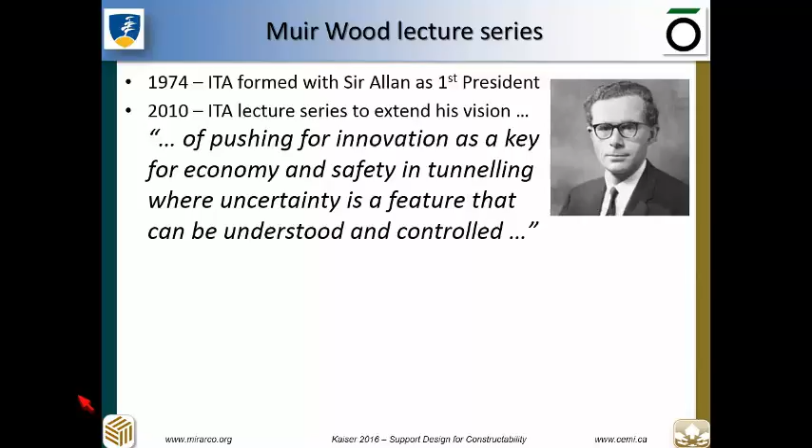As was just said, the lecture series was created to keep the spirit, the vision of Sir Allan alive, and to push for innovation for economic and safe construction in tunneling situations where uncertainty is part of the problem. Previous lectures have dealt with issues of hydrotunneling, large tunneling projects, machine tunneling, subaqueous tunneling, and tunnel face stability.

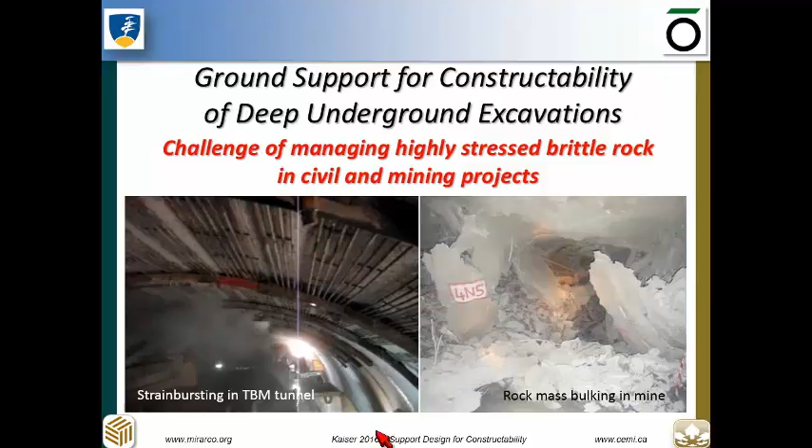I've chosen to talk to you today about challenges of managing highly stressed rock in brittle failure modes for both civil and mining projects, simply because I have seen that many projects are suffering problems in these conditions, and innovation, as in the left image, is needed to deal with strain bursting conditions. If it gets out of control in mining, we have serious instability problems that have to be mastered by better understanding what the rock is doing and what the support has to do.

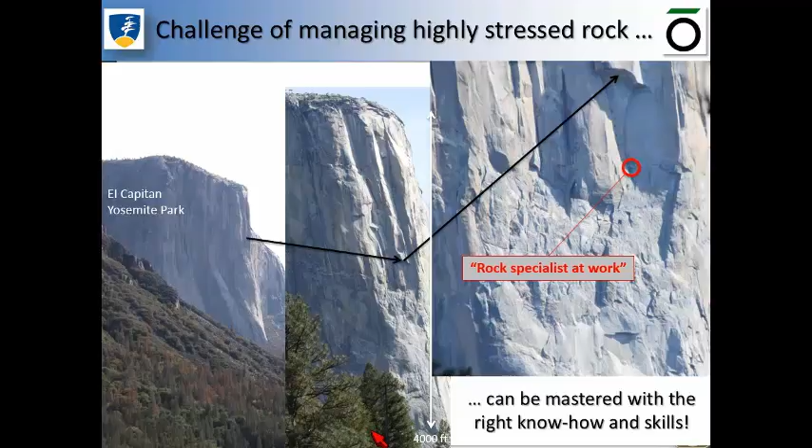Having just spent the week in Yosemite Park, I couldn't resist putting this slide in to indicate that I have a very narrow focus. I will address this topic from a rock mechanics perspective, and also to indicate that there is no challenge too high that it cannot be overcome when we have the right know-how and the right skills. You may not see the little guy in the image climbing the cliff of 4,000 feet. It takes a climber typically two days with two overnight stands. This individual can climb it in less than five hours, 4,000 feet vertical.

I was always inspired during my research by Sir Allan's writings, his books, etc. Unfortunately, I never had the pleasure to work with him or to meet him. But one notion that he presented at the British Tunneling Society reflects the content of the message that I have today.

Tunneling contracts are best implemented based on a detailed design procured by the client before tendering the construction contract.

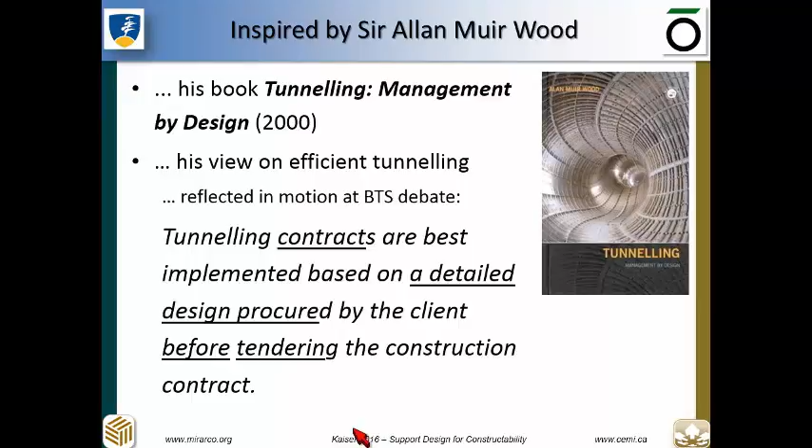Robust engineering, independent of whether the engineer or the contractor is responsible for the design, has to take into account the complexity and variability of the geology, and has to consider aspects of construction so it can be built efficiently, safely, and with an effective support system. For that purpose, it is necessary to properly describe and anticipate the rock behavior as well as the excavation behavior.

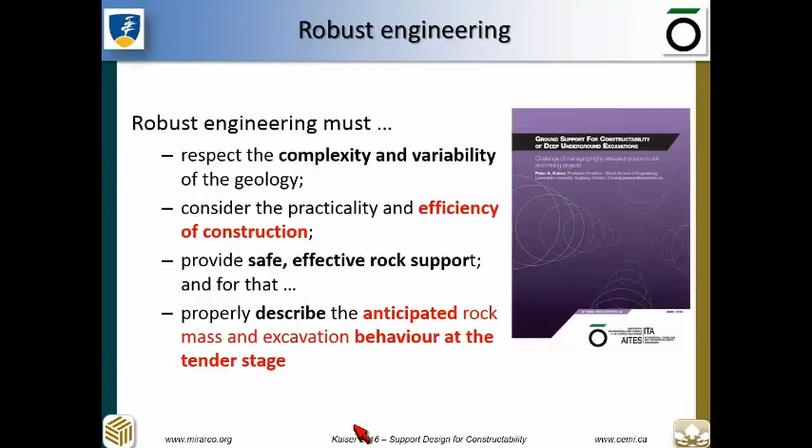In my experience, many problems that we have encountered in deep construction come from the fact that the behavior was not properly anticipated, not described, and as a result, the efficiency of the construction process was hampered.

Dr. Hoek, in his online lecture on the art of tunneling, uses this matrix to describe the failure modes that we can anticipate in tunneling, characterized by the stress level on the vertical axis and the rock mass quality or strength on the horizontal axis, basically describing the whole spectrum of tunnel behavior from essentially elastic to squeezing condition in the lower right.

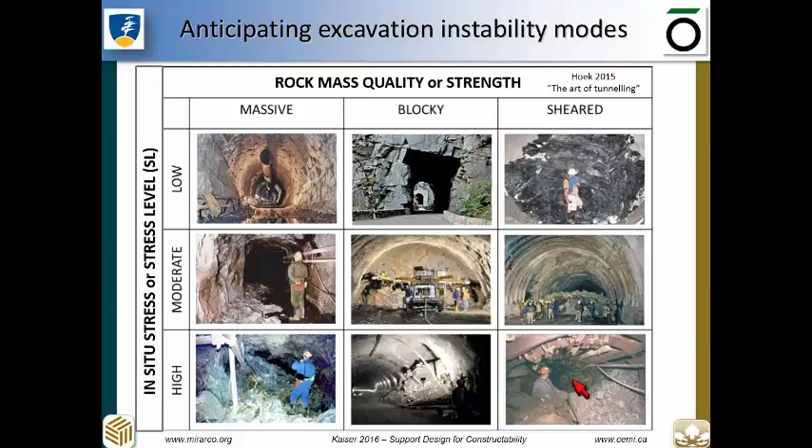Terzaghi, in the mid-1940s, was the first to try and quantify how different rock classes behave. He used different classes to describe what the rock load on steel sets should be, linking the geology and ground condition to the tunnel behavior and support requirement.

All the rating systems that we use today, Q, RMR, and in our case GSI, to get numbers for rock support design or for the determination of strength, are basically built on those early steps.

I had the pleasure to work with Dr. Hoek to establish the GSI system, and as you can see on the left side here, one axis is basically built on the rock classes that Terzaghi had identified, the blockiness of the rock mass.

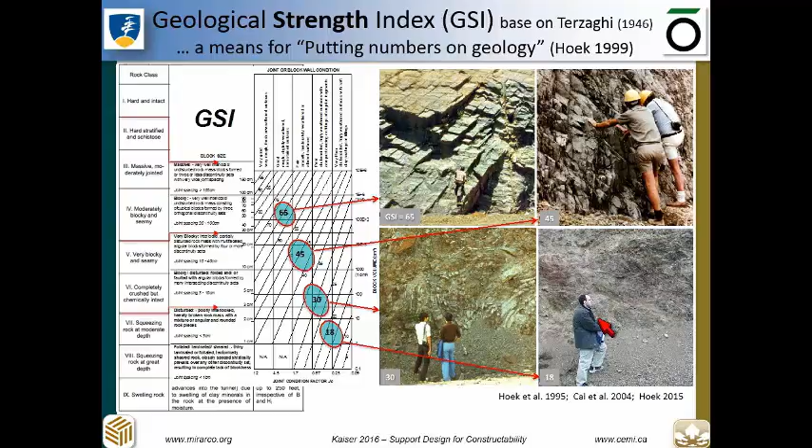It is then combined with the joint conditions that make up the blocks, and in this way it is possible to assign a number to a certain rock condition. You see four examples, from reasonably good quality rock to poor quality rock. GSI is not an accurate or magic number, but it gives us the ability to assign numbers or ranges to the rock quality needed to identify the anticipated failure modes.

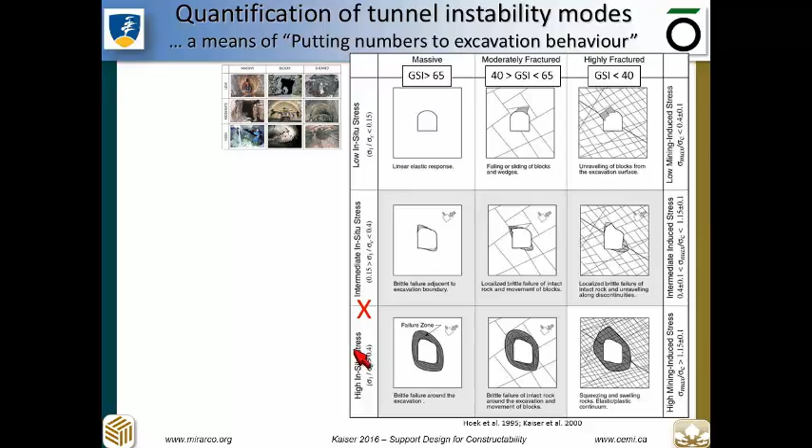On the vertical axis, we have the stress conditions, typically described by the overburden, which unfortunately leads to many problems, as I'll explain later. It is much more appropriate, as shown on the right side, to define the stress level by the maximum tangential stress around an excavation, which can be simply calculated from the principal stress values and the stress ratio.

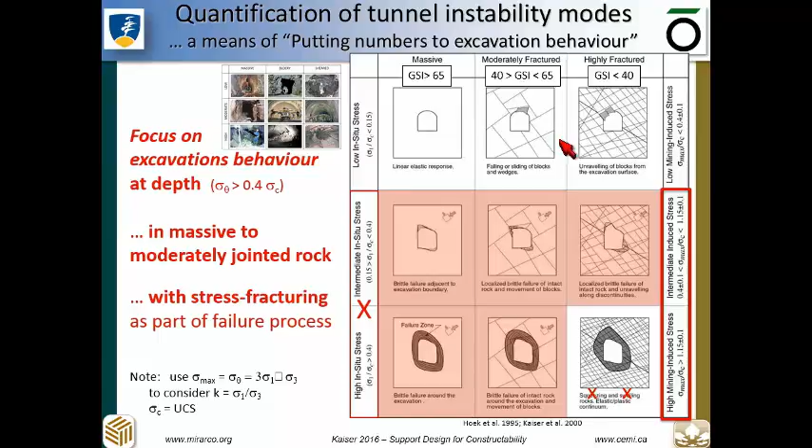I'll come back to this later, but by the hatched areas, I'm indicating that my talk today is focused on these five rock classes, not on cases where structurally controlled failure dominates or where we have squeezing or swelling conditions.

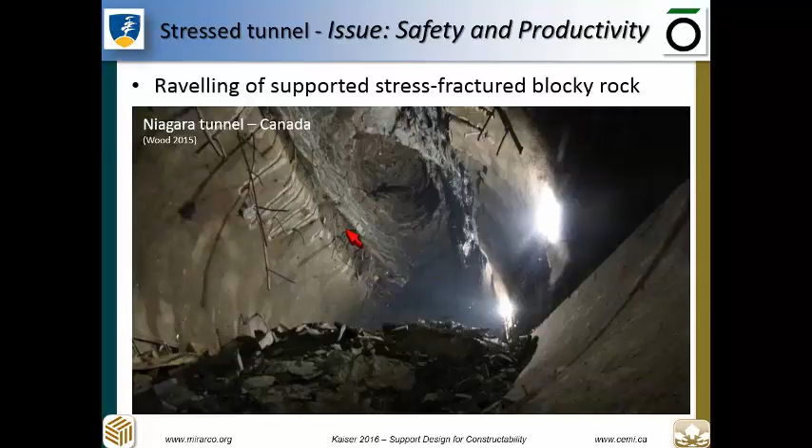Just two examples to illustrate what I'm talking about. This is a tunnel many of you have heard about, the Niagara Tunnel, where we ended up with severe instability problems, as shown here, because of high horizontal stresses causing failure in the roof. The contractor realized the problem and tried to overcome it with supplemental support. The point I like to make is that this type of condition was not anticipated at the tender stage, and therefore led to serious safety as well as production issues.

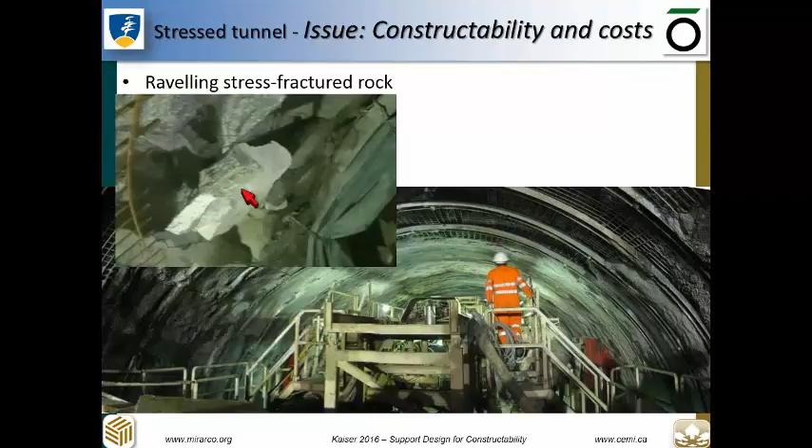The second example, from the Gotthard Tunnel, shows stress-fractured rock emerging from the TBM finger shield. You see the stress fractures in individual blocks, and the consequence is what I call raining rock behind the finger shield. When the support system, designed with U-profiles, had to be installed, we end up with flying arches that are not in contact with the rock and therefore do not immediately function as a support system.

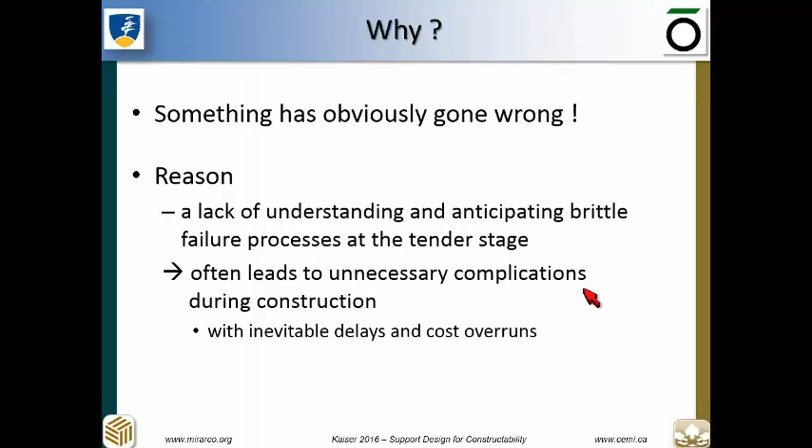So when we have these kinds of situations, we have to ask ourselves, why do we have these problems? What do we not understand? In my view, most of these problems are related to the fact that the brittle failure process of the rock mass is not understood at the tender stage. I'd like to explain to you why, and how we can anticipate these types of conditions so that we don't have interruptions of the construction process.

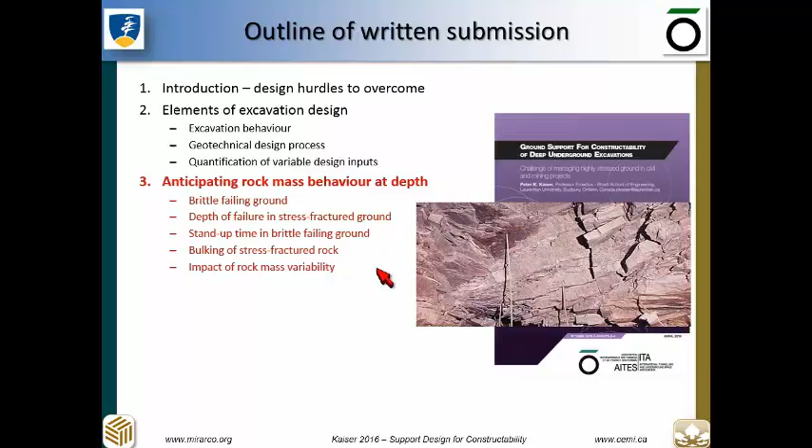I will focus on the anticipation of rock mass behavior at depth, and then try to summarize how that should impact support design, what I call deformation-based support design, towards the end of the lecture.

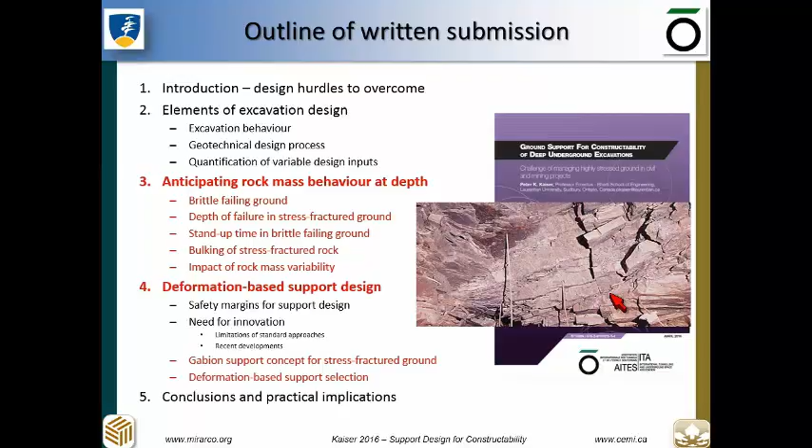On the right here, you see an image of a rock mass that illustrates what I'm talking about, a rock mass that is stress-fractured and is falling apart into blocky fragmented materials.

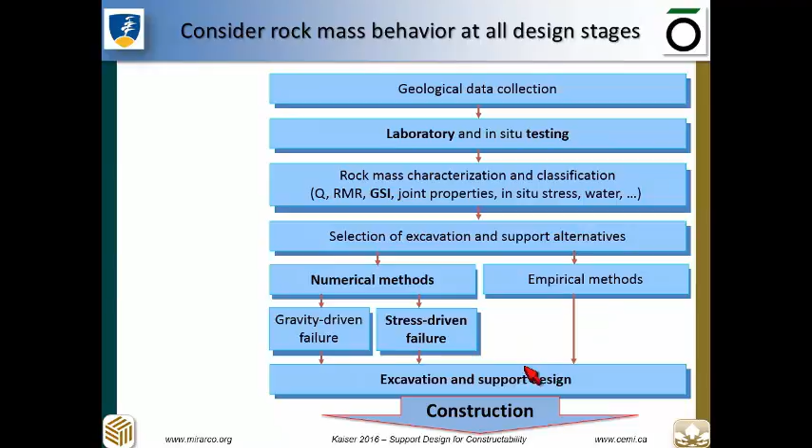The general process of designing a tunnel from a geomechanics perspective includes the various aspects everybody's aware of: geology, data collection, drilling, laboratory testing, classification, leading to a preliminary selection of the support system as well as the excavation technique, then more sophisticated numerical analysis or empirical techniques to come up with something that we hand over to the contractor to build the tunnel.

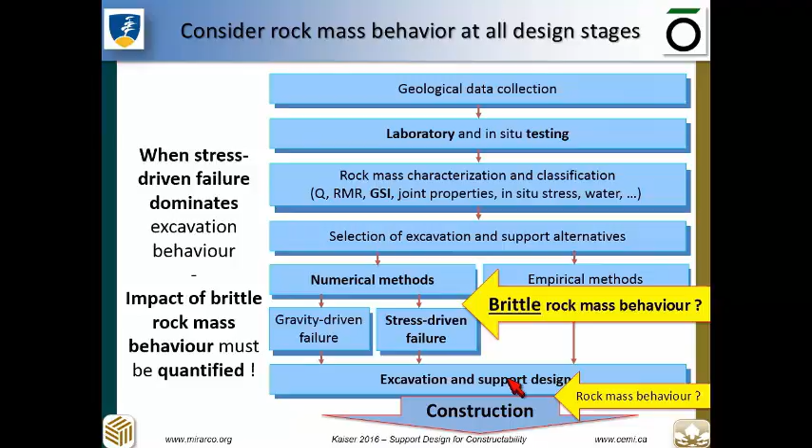When we deal with brittle failure and stress fracturing, as I just indicated, we have a problem at the interface between numerical modeling and empirical methods in determining the construction problems. So how does brittle rock fail?

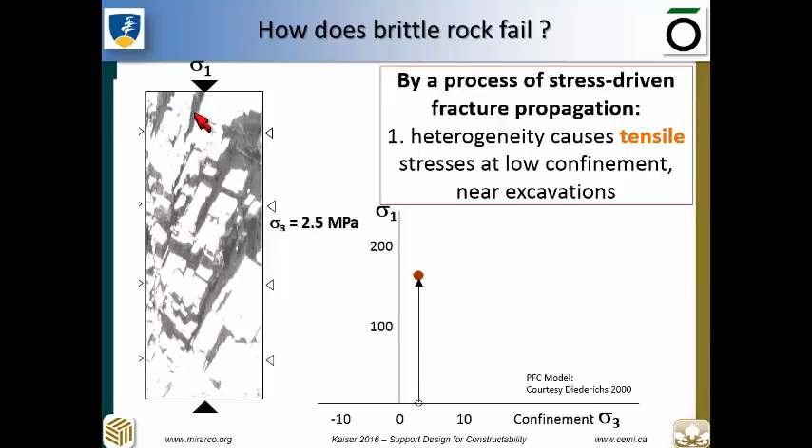I'm illustrating this on a heterogeneous sample loaded in the vertical direction, confined with 2.5 MPa, more than any support can provide. As you load this piece of rock up, you end up with a stress distribution that is not uniform.

As the dots indicate here, you end up with islands of tensile conditions in a rock mass that overall is confined, but locally is not confined.

If we go back to work by Griffith and Hoek and others in the early 1900s, and combine this with the fact that cracks propagate easily as confinement is reduced, we understand that spalling behavior, as illustrated here with parallel fractures to the excavation, must be expected whenever tensile or near tensile conditions are generated in the rock.

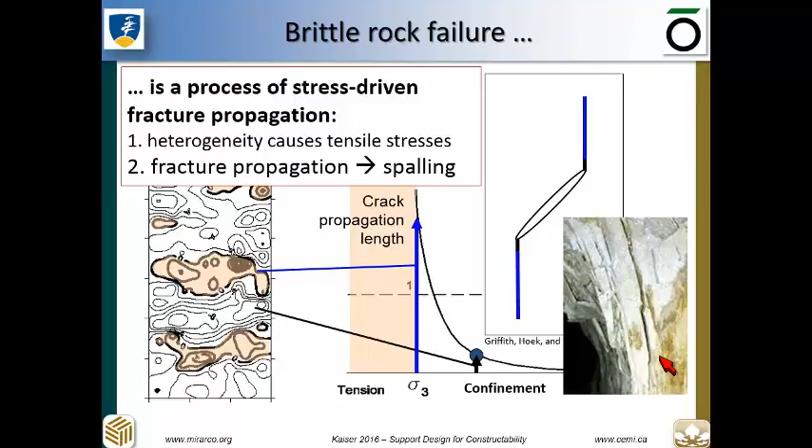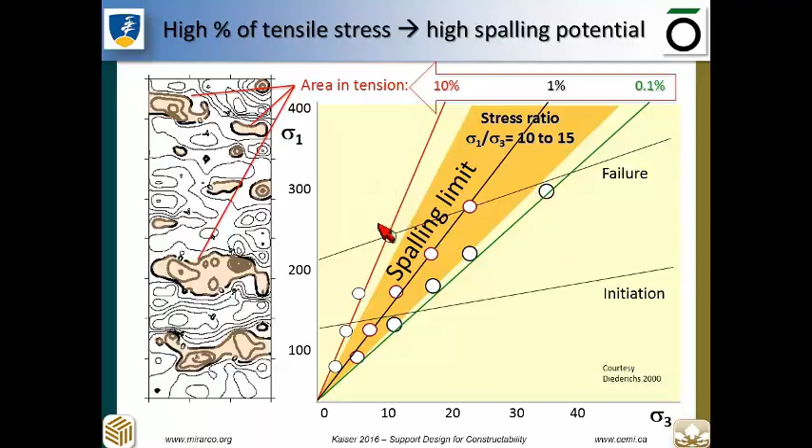Putting it the other way around, there is a limit, which we call the spalling limit, when we cannot confine the rock enough, and we have spalling behavior, as I just showed you in the previous slide.

The practical relevance is that the rock mass strength we anticipate using standard procedures is severely depressed in the low confinement area, so instead of a continuous failure envelope, we have an S-shaped or trilinear failure envelope. The major point is that the strength near the excavation in these rock types is about 50% or less of what we typically anticipate.

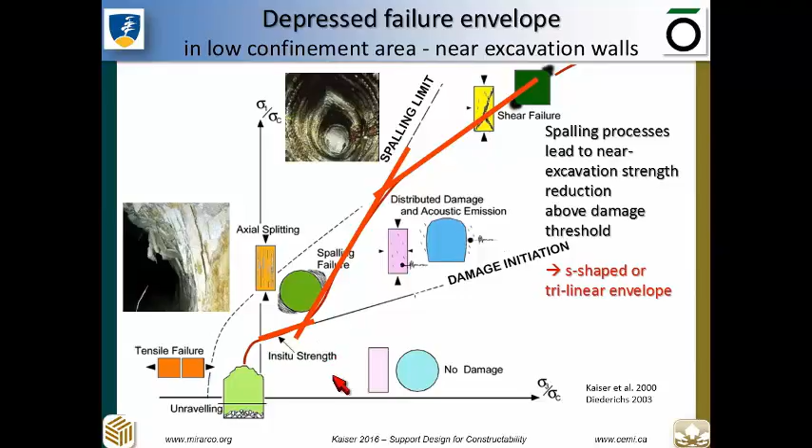For practice, this has a very important implication: to the left of this limit, shown here at 10% of the UCS (unconfined compressive strength), spalling processes dominate, whereas to the right, shear failure mechanism dominates. For practice, it means all the problems related to support selection, related to strain bursting,

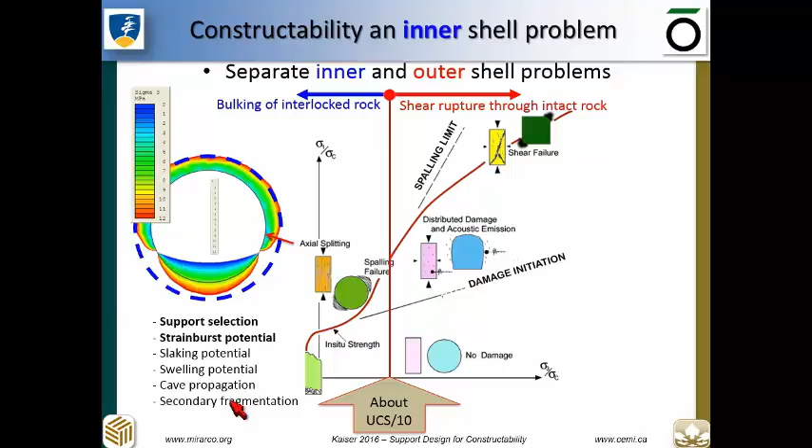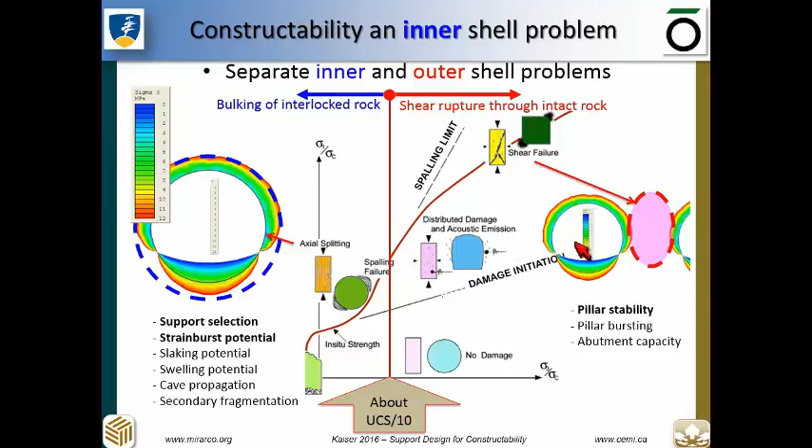or other mechanisms, slaking mechanisms, swelling mechanisms when water penetrates through cracks, caving in mining, or fragmentation, are dominated by how the rock behaves in this depressed strength area, and not by what happens when we have good quality rock. Only when we deal with issues of pillar design would we be able to mobilize the full strength of the rock.

So looking at this in more detail, taking an example of a UCS of 120, dividing by 10, and plotting the confinement contours around a tunnel, you recognize that the inner shell, the zone where this spalling mechanism occurs, is relatively shallow, maybe half of a tunnel radius in most situations.

If we model this with a fracture code called ELFEN, we find something very interesting: if the stress ratio is 0.5, meaning higher vertical than horizontal stress, we would only anticipate stress fracturing in the walls. However, if a rock has a relatively low tensile strength, the stress fracturing process does not follow the conventionally known yield conditions.

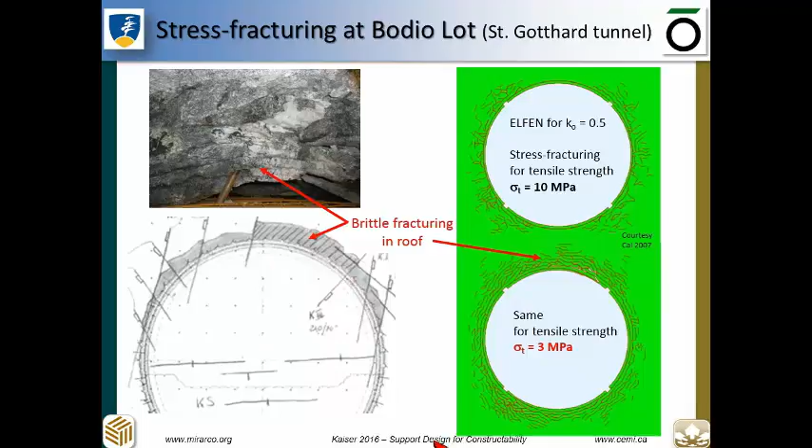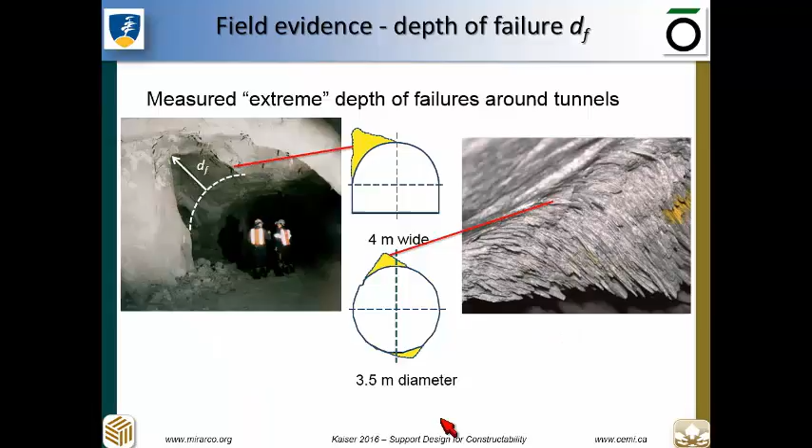What is of practical relevance is that this process does not start when the stress around the excavation reaches the laboratory strength. It starts at 40% of the strength.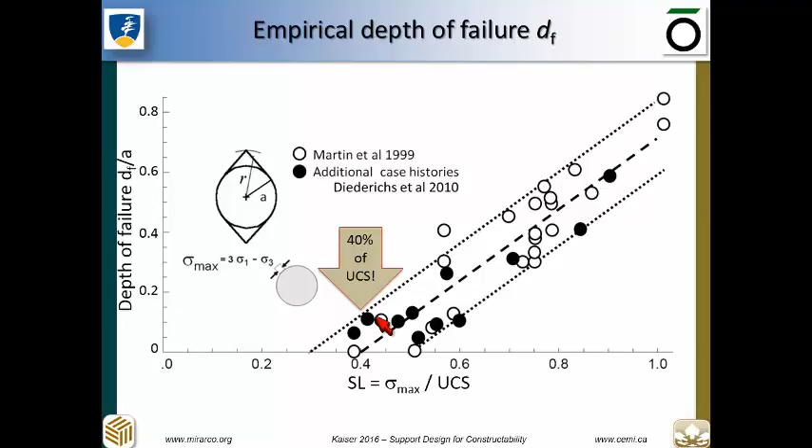Recently, Perras and Diederichs have done some work to illustrate that this relationship may not be perfectly linear, rather curved, but more importantly, they also have added knowledge to allow us to determine what the mean depths of failure is around excavations. So the greatest depth of failure, if the stress level at the excavation boundary is equal to the strength of the rock, would be in the order of 70% of the tunnel radius, and the average or mean depth of failure along a project would be anticipated to be maybe 15% of the tunnel radius.

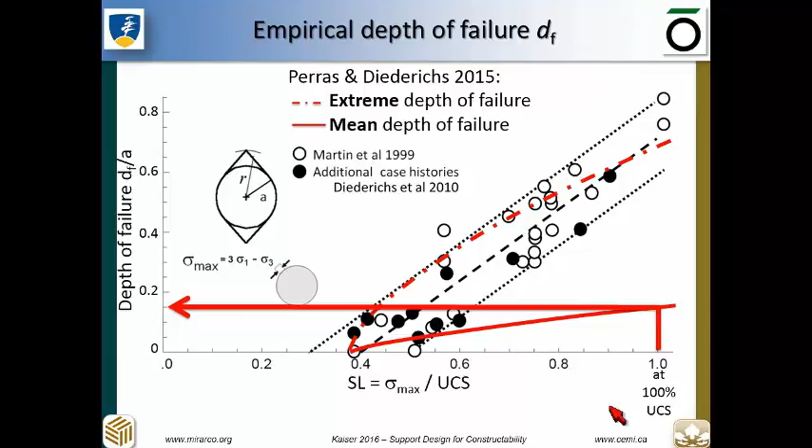The point here is, without boring you with the technical details, that today we can anticipate brittle failure as well as the extent, and most exciting overall, we can anticipate the percentage of problems that might occur along a tunneling project.

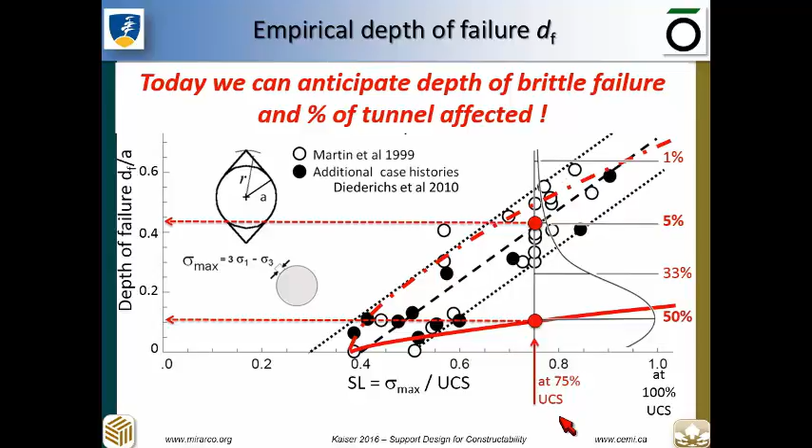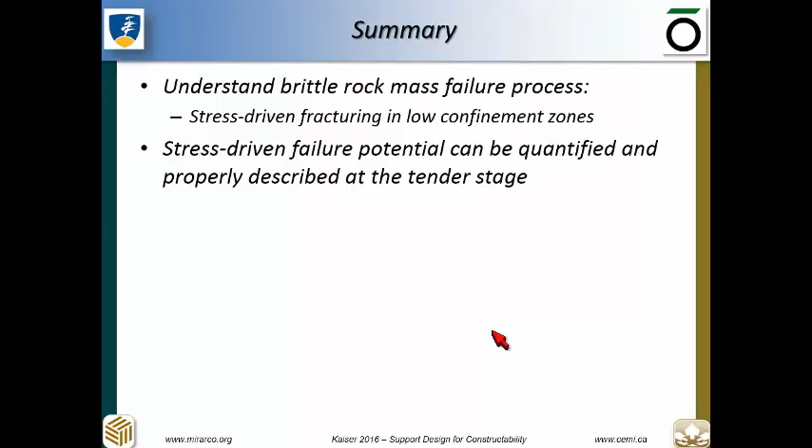So in summary, for what I have talked about so far, we understand what the brittle failure process is. It is stress-driven. The stress failure can be predicted and quantified and properly described at the tender stage. And today, retroactively, it is well understood why we ended up with these situations that I illustrated earlier.

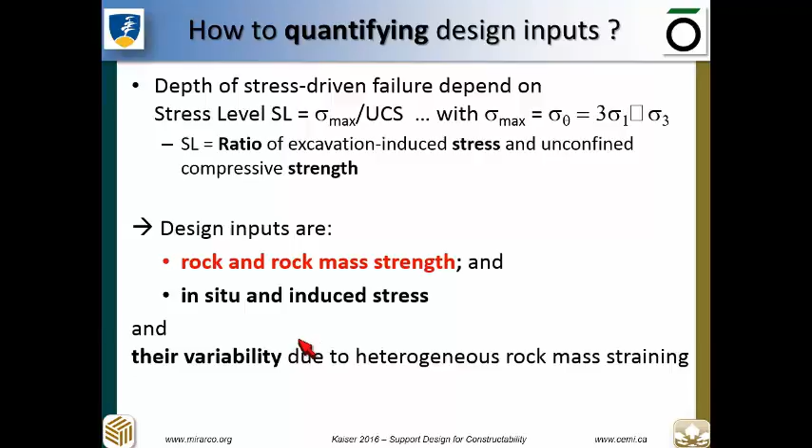So how do we quantify what is to be expected in a tunnel project? The situation is relatively simple because the stress level basically contains two aspects: the maximum stress around the excavation and the strength. Therefore, we need to establish the rock strength as well as the stress, and most importantly, the anticipated variability along a project.

The details are described in the written note, but we basically use laboratory testing and rock classifications to arrive at rock mass properties that go into the design.

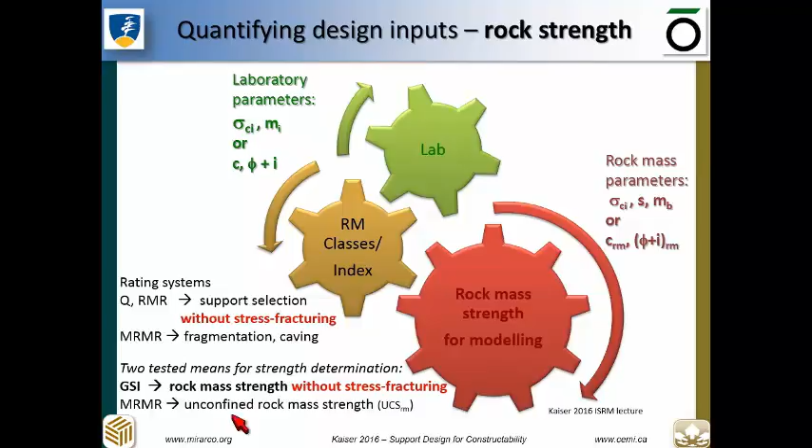The unfortunate thing is that both the Q, RMR, and other systems have not been calibrated on conditions with stress fracturing, including the GSI approach that I have introduced earlier.

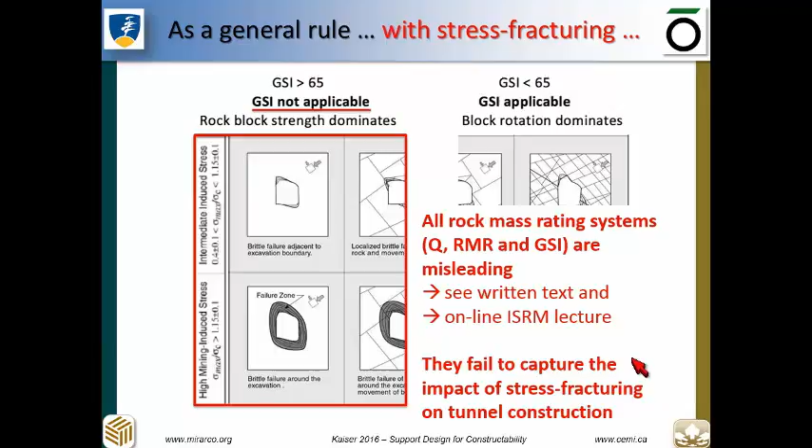And in general, that means that in conditions where we have massive to moderately jointed rock and intermediate to high stress levels, the conventional or available systems fail to capture the brittle failure process, the disintegration due to stress.

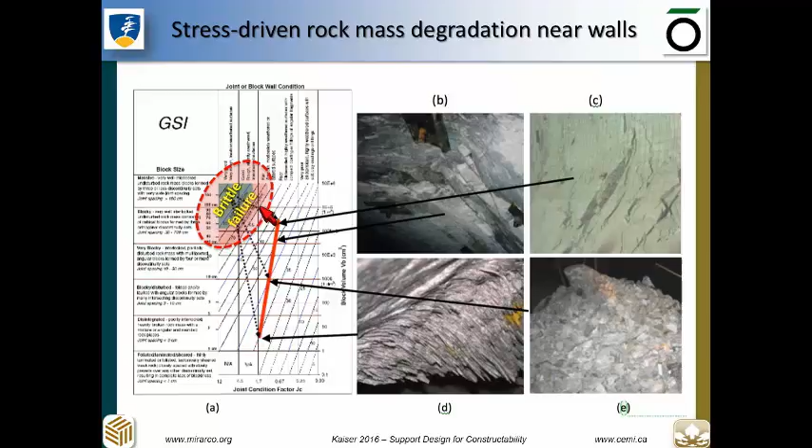To illustrate this, let's look at some examples here where we start with a rock that is compact, massive, but due to stress, we have excavation instability modes that lead to relatively large, blocky materials, or to relatively small, slabby, disintegrated rock. The point is, from a tunneling perspective, we're not dealing with the nice, undisturbed rock. We're dealing with the degraded rock properties.

And if we translate this knowledge into Bieniawski's stand-up time chart, which has the stand-up time as a function of span and rock quality, we have to realize that our tunnels that we excavate are not in the virgin ground condition. They're dealing with the degraded rock.

In terms of the GSI chart, that means we're not dealing with conditions of high GSI values, but lower GSI values, and therefore stand-up times that are not in the order of months, but they're in the order of a few hours.

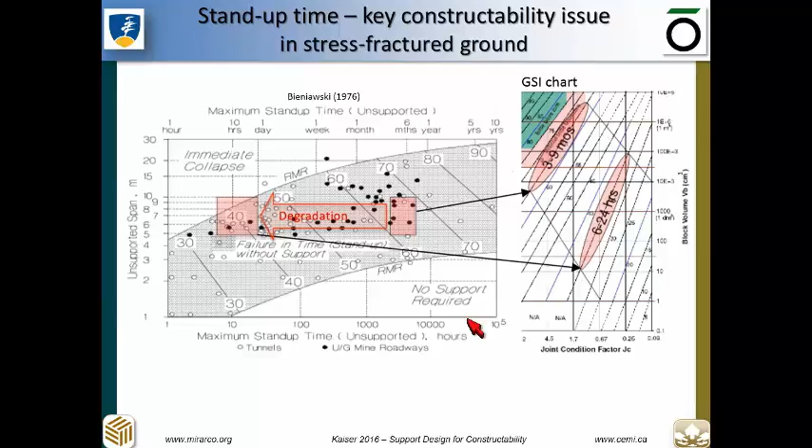The only way to overcome these problems is by constructive measures, and if the construction techniques are not such that the stand-up time issue can be managed right at the face, you end up with delays and excessive costs because you have unraveling problems of the inner shell or raining rock, as I had introduced earlier.

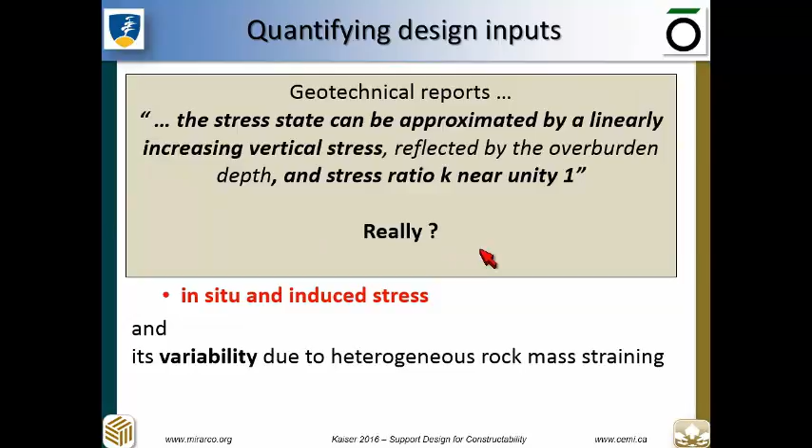The second aspect is to determine the stress field so that we can better anticipate the depths of failure. Too many times I read in geotechnical reports that the state of stress is expected to follow a linear trend with depth of overburden, and that the stress ratio can be assumed to be nearly unity. I have to ask you, is this really the case?

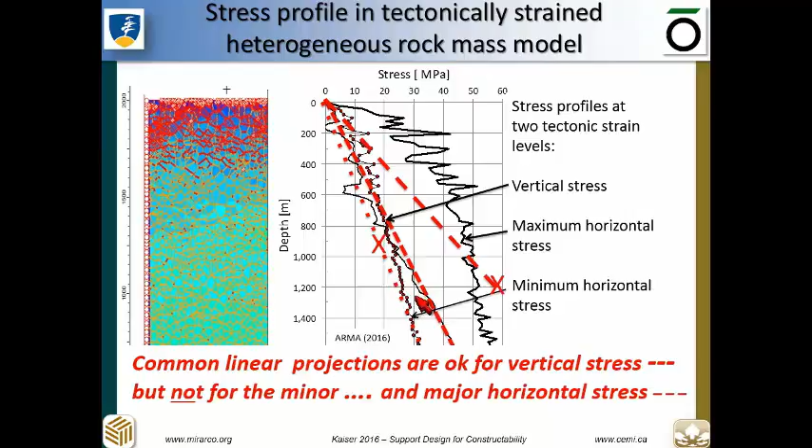I use here a calibrated model for a Canadian shield of 2,000 meters of rock that is heterogeneous, tectonically strained to reflect the setting in the Canadian shield. On the right side, you see a plot of the vertical stress, the minor horizontal stress, and the major horizontal stress. If you describe this by any linear trend, it is quite obvious that the input for the design is highly flawed and incorrect, because we have variability in stress, particularly in horizontal stress, and maybe in vertical stress we have a linear trend, but certainly not for the other two stress conditions that dominate tunnel behavior, the horizontal stresses.

As you can see in this figure, there is a linear trend at depth, but there is an intercept at the surface, which means the stress ratio K, the ratio between the major and minor principal stress, is not constant with depth. It actually has a very high value near the surface, and these black lines show that when you introduce heterogeneity into a rock mass, this ratio varies widely.

You also see on the graph measurements along a tunnel that reflect this high variability that the numerical model presents. The conclusion is very simple: if a project is designed under the simplified assumption of linear stress with depth and a K-naught ratio near unity, you're far off from reality, which is that stress is highly variable in a heterogeneous rock mass along the project.

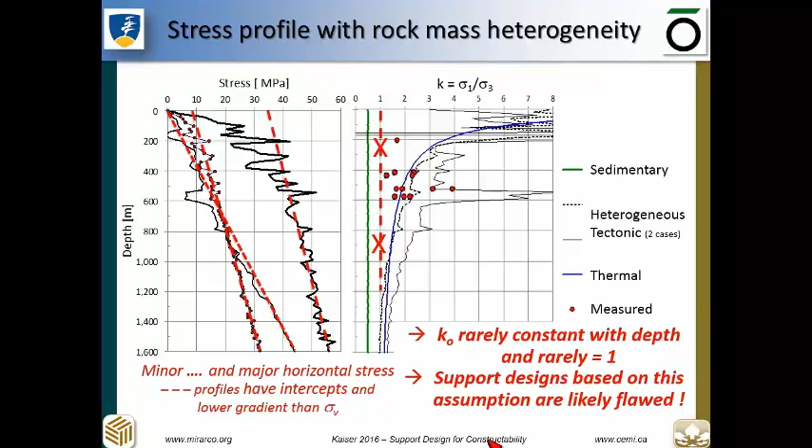And if you support this design on the simplistic assumption of K-naught equal to 1, it likely is flawed and will not be adequate to solve the problem with stress fractured ground.

Earlier, I introduced the concept of depth of failure prediction, and for that we need the tangential stress around the excavation, which I have now calculated for this model, and we find some very interesting things. I have assumed that the tunnel is at different depth levels, and I've calculated the maximum stress in the wall and the maximum stress in the roof. They're very variable and changing with depth.

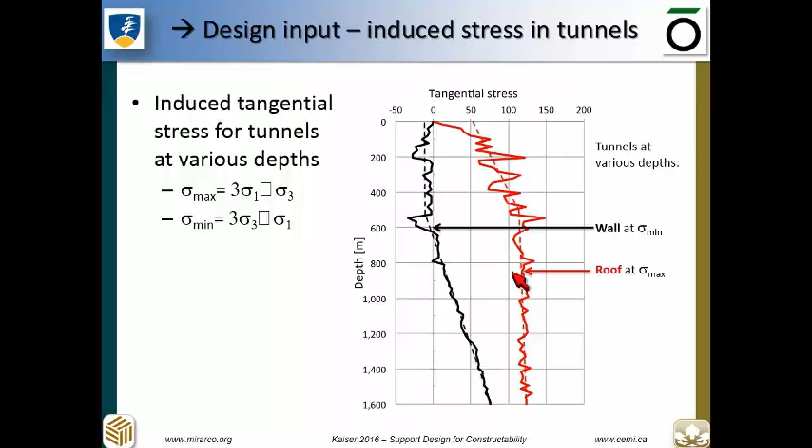The implications for a project are that you have various failure modes dominating near the surface. Low confinement or even tensile conditions in the wall and low confinement in the back lead to structurally controlled failure mechanisms. However, locally there can also be extreme stress concentrations, twice the stress encountered just before, and this leads to a combination of stress fracturing and joint interaction that then leads to the spalling type behavior that I introduced earlier.

As we go to greater depths, the failure mechanism changes, and interestingly, the stress in the roof more or less stays constant, independent of the depth of the tunnel. It still is slightly variable, but as we go deeper, the stresses in the walls increase, and as a result, the failure mechanism around the excavation changes as the stress field changes.

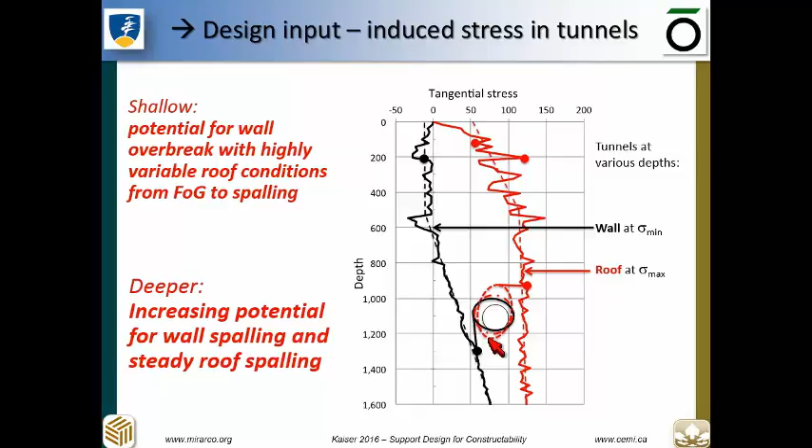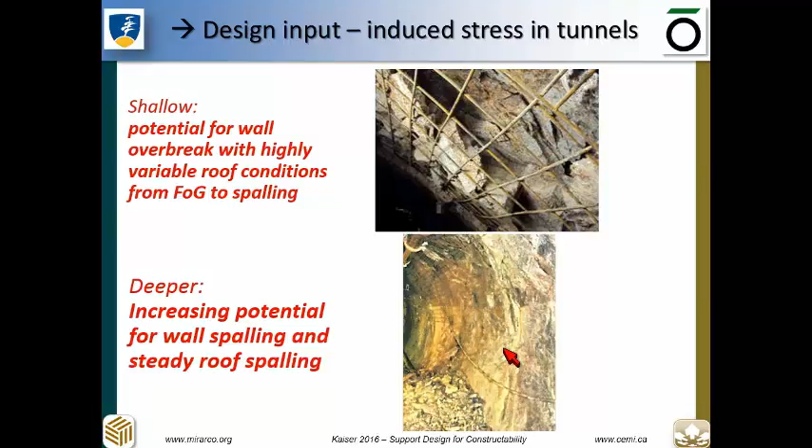Here are two images to illustrate that. The top one shows stress fractured ground in a tunnel in the upper area, where stress was dominating over the structure, and then at greater depths, the stress fracturing mechanism rotated to the side walls. And if you have a TBM, you can imagine the kind of practical problems you run into.

In the written contribution, I have two case histories that are too complex to discuss here, but in the image below, I show you how the overbreak varied on a tunneling project within 15 meters, and the rock was relatively uniform, but the stress was changing drastically. So we have overbreak in the back on one side, overbreak on the other side, and eventually overbreak including the entire circumference, even floor heave due to bulking of rock in the base.

So in summary, for this part, we have highly variable stress and rock conditions. If that is the case, we need to quantify the variability in strength and stress along a tunneling project, and then translate that into construction and support techniques that are amenable to this variability.

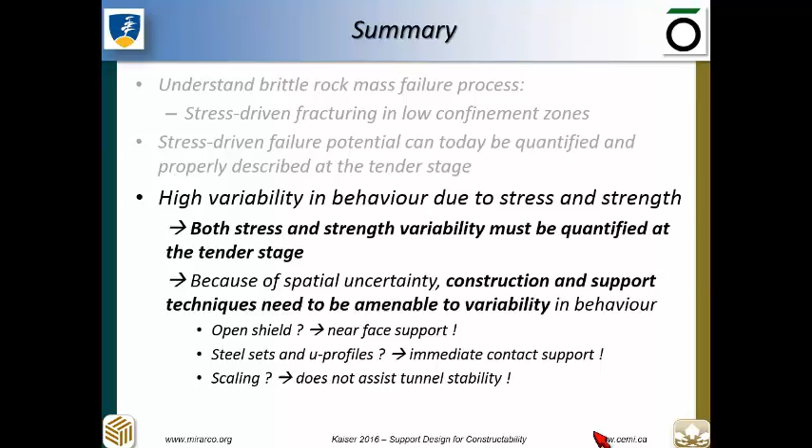Open shields cannot manage rock that is stress fracturing right at the front easily, and cannot provide face support. If you use steel sets or U-profiles, you have no support immediately interacting with the failing rock, and it only becomes effective once you shotcrete it in, at a distance from the face. Scaling practices that are often used are not really helping stability; they only increase the overbreak and create difficulties with construction.

So now that we understand what brittle failure means and what the consequences are for underground construction, I'd like to move to the ground control issue of how we support this type of rock. Clearly, from what I have described so far, stand-up time issues have to be managed. The rock wants to ravel, it wants to fall apart, and immediate support is required to stop this process.

But there is something else that happens when you stress fracture a rock. Just when you blast it, the volume after blasting is significantly higher than before, and we call this a bulking process, illustrated in this Voronoi cartoon model, showing that the geometric fit of the individual blocks doesn't allow the rock mass to stay together, and it increases in volume.

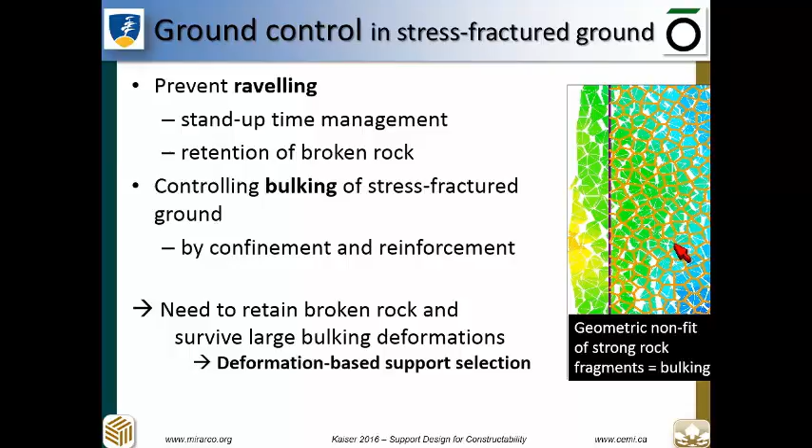So if we want to support this type of rock, we have to find ways to deal with the volume increase that occurs as the rock is failing, and that means we need to design so we can survive the deformations imposed by this process of disintegration.

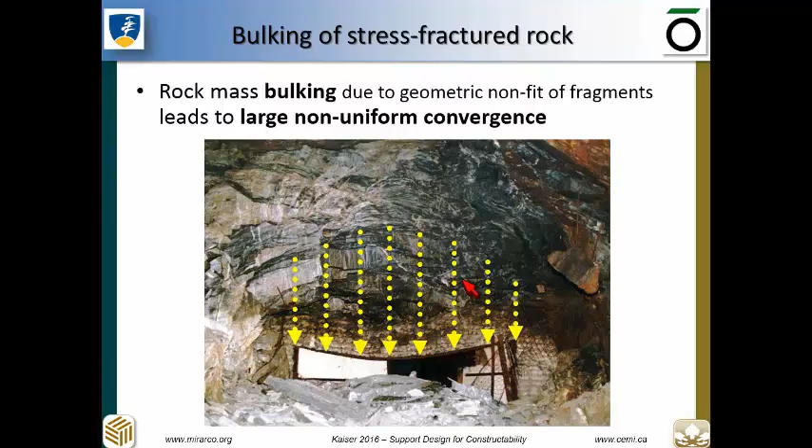To illustrate the relevance of the bulking process, here is an example of a stress-fractured rock mass above a vent door, and the opening of cracks and fractures in that rock mass led to half a meter or more of convergence in the center of this vent door. This is what I'm talking about: stress fracturing causing large deformations through an excavation.

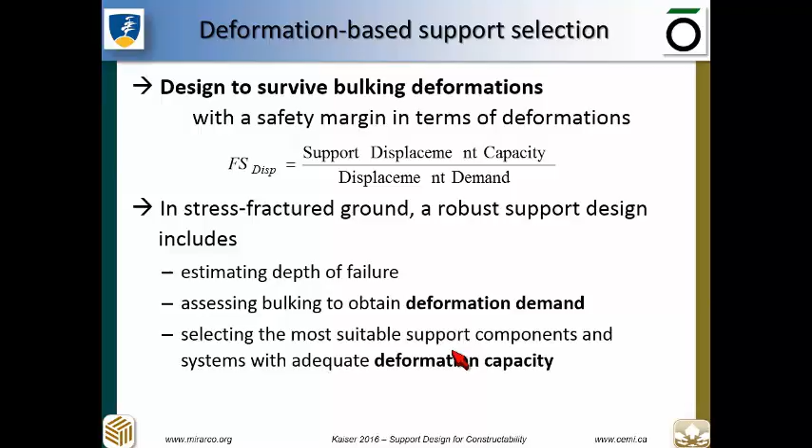In the written version, I explain why load, factors of safety, as well as energy and bursting conditions, are not really most relevant for the design. We need to design against the deformation that stress-fractured rock brings, and for that we have to establish the depth of failure that I explained earlier. We then have to figure out what is the deformation demand, how much is this rock mass bulking, and what is the deformation capacity of the various support systems.

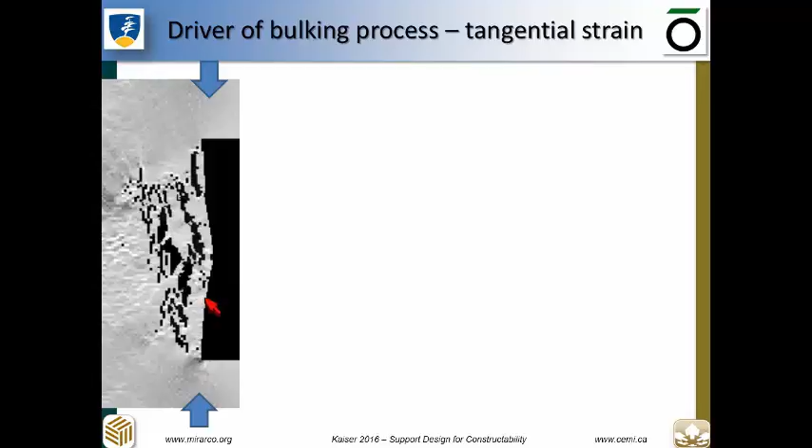Let me illustrate the process again with a numerical model, where we have a pillar being loaded and strained, and we see typical stress fracturing as well as buckling mechanisms, and I'm sure many of you have seen that in the field.

This is the image I showed earlier, compact or massive rock being strained, stress fracturing, leading to a disintegrated rock mass. Where can it move to? Only to the right, into the excavation.

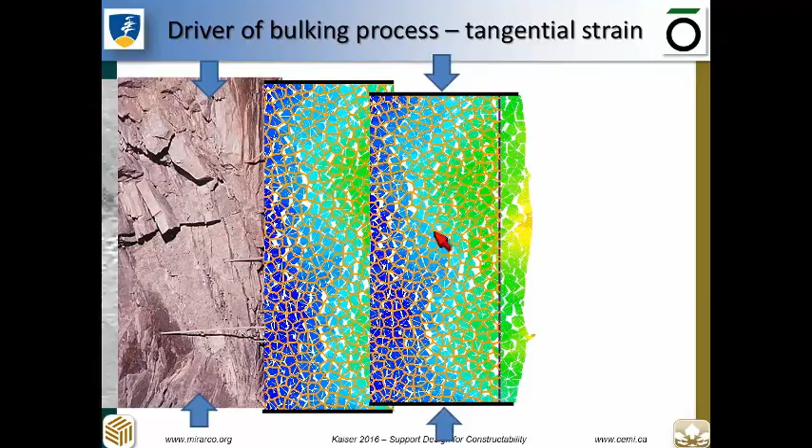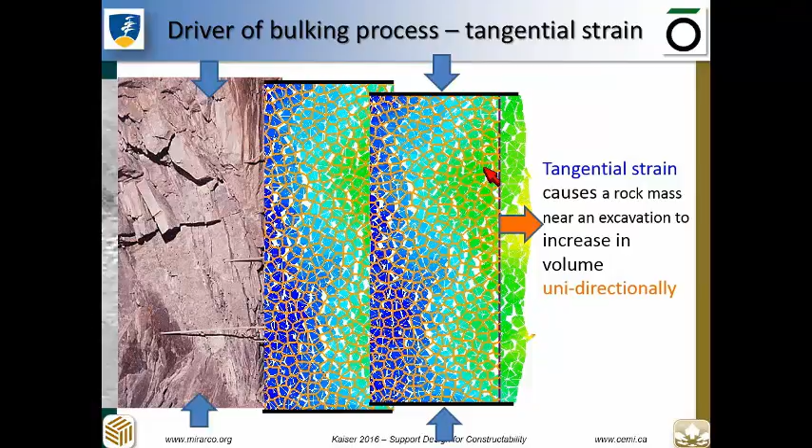So if we simulate that with a Voronoi model, we realize that any tangential straining is causing radial deformation into the opening. This is a very important, simple fact: if we do not cause tangential straining of stress-fractured rock, it won't move into the excavation.

In this mining situation, the pillar was not wide enough, so we got excessive deformation, or the cave control was not sufficient, so we got excessive deformation, and it was that driver of bulking that was the source of the problem. No support would be adequate to stop that deformation. Other measures have to be taken, such as moving tunnels apart, making pillars wider, or controlling the loading process, if you want to prevent these types of failure processes.

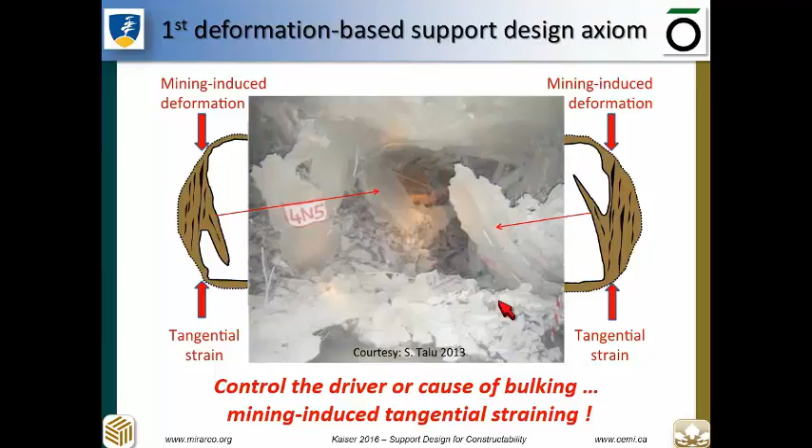The first element, therefore, of deformation-based support design is to identify what are the sources of tangential straining of the excavation that deforms the bulking rock.

The second axiom is that if you have a rock that wants to bulk up, increase in volume, because it is geometrically not possible to have these blocks move relative to each other, and we have a certain level of strain, we have to control the bulking process.

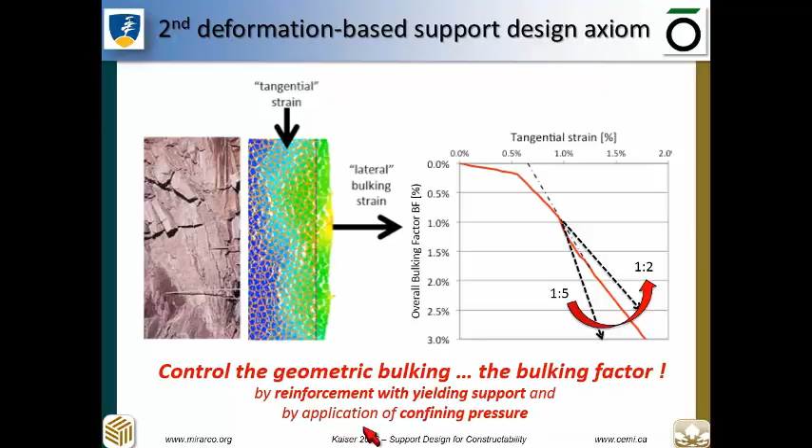Therefore, the second axiom of deformation-based support design is to support it such that this bulking process can be reduced from, let's say, 5-to-1, to 2-to-1 or even better. For that, we need reinforcement of the broken rock mass by yielding support that sustains the localized straining, as well as confinement so that the broken rock cannot increase excessively in volume.

If we excavate a single tunnel, and have relatively limited strain because there is no other source of deformation — in this example, with a light support providing 0.1 megapascal of support, we would have about 2.5%, and if the depth of failure is 1 meter, we would have 25 millimeters of deformation due to bulking.

If the same tunnel was in a mining situation where we add additional tangential straining of about 1 to 2%, the same tunnel would have a deeper depth of failure of, say, 2 meters. The bulking would be much more significant, and we would have 160 millimeters of deformation. Even if we support this tunnel with an unrealistically high confining pressure of 1 MPa that we can never achieve, we would still have in the order of 90 millimeters of deformation.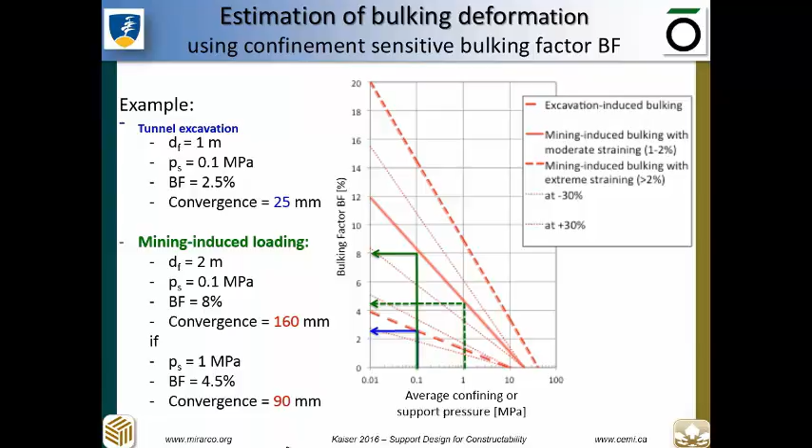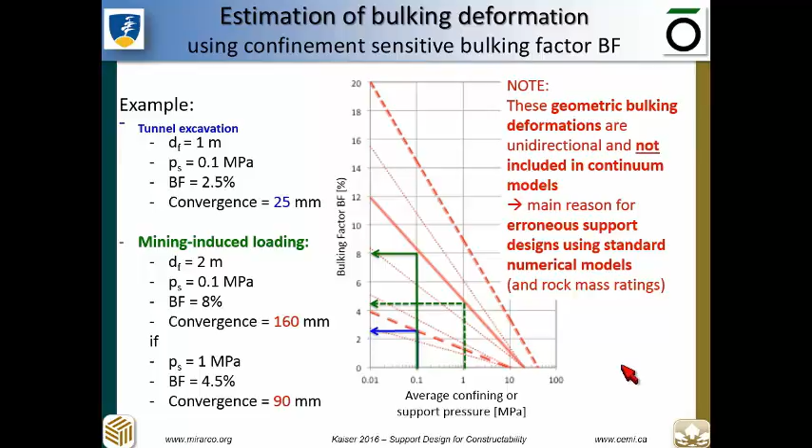The point I want to make here is not how to exactly determine these values, but to point out that none of the numerical models conventionally used in support design take into account the bulking process and therefore the deformation that comes from it. So in these examples, 25 to 160 millimeters of deformation is not taken into account when you use conventional continuum mechanics models in the design, and therefore the design presented in the tender stage is clearly flawed.

So in summary, the goal of deformation-based support design in these rock conditions is, first, to eliminate the drivers of the bulking, which is the tangential straining, by whatever means available, and then second, to control the bulking of the rock mass itself by reinforcement or by providing support pressure.

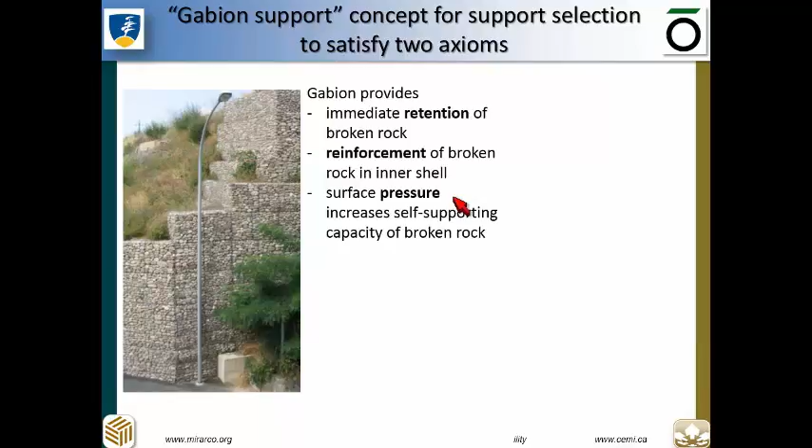To explain this process better, I use here an analog of a gabion. What do we do when we use a gabion in a retaining wall? We take broken rock and retain it within a cage of steel. We reinforce it across the gabions, and as a result apply some surface pressure to a slope behind.

If we translate that into tunneling situations, the solution is that when we deal with stress-fractured rock, we have to generate a gabion-like support system consisting of bolts and retention systems able to stop the bulking process, resist tangential straining in the vertical direction, and provide confinement to the rock mass behind it, stopping the deepening of the stress fracturing process.

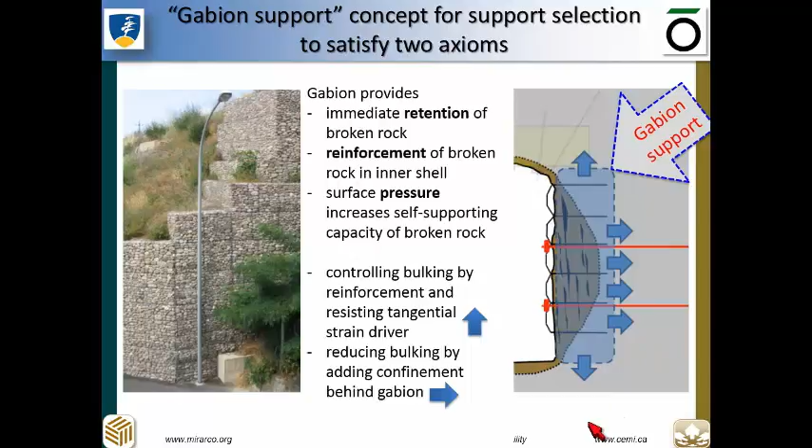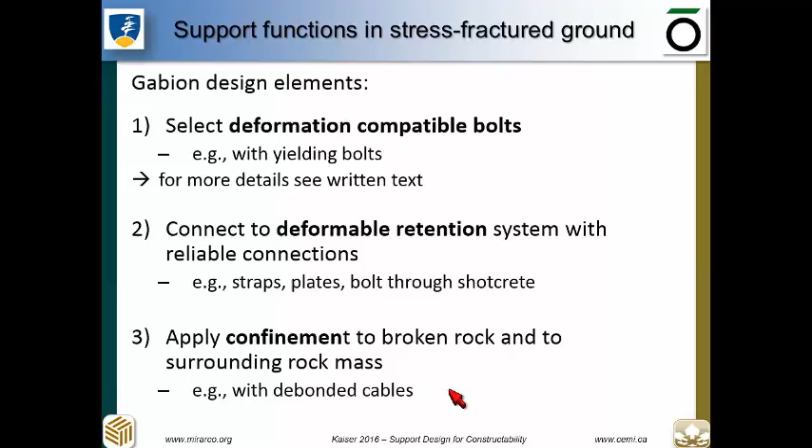So deformation-based design basically means to define what the deformations are and then select deformation-compatible support components, yielding bolts - again, I give more details in the written version. We have to have a deformable retention system. If you have a shotcrete arch that is very stiff, the bulking process will self-destruct the support system, and we have to confine it by potentially adding debonded cables, cables that have enough give so the rock can fracture and expand.

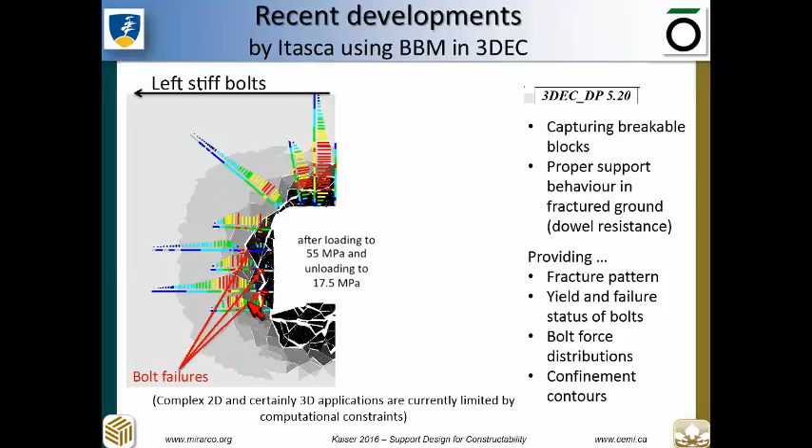Let me end by pointing out that some recent developments by Itasca are very promising, so that we can capture this in the future. What you see here is a bonded block model in 3DEC that captures the stress fracturing process around the excavation and also shows support elements performing in this media, illustrating that at the points where the blocks are separating, we have failures of stiff supports.

If we support the same rock under the same condition with deformable, debonded cables or yielding bolts, the overall pattern of failure is not changed very much. The gray scale shows how much confinement there is on the excavation, but we see that the bolts are yielding, shown in red, but they're not failing, because the yield deformation is distributed properly.

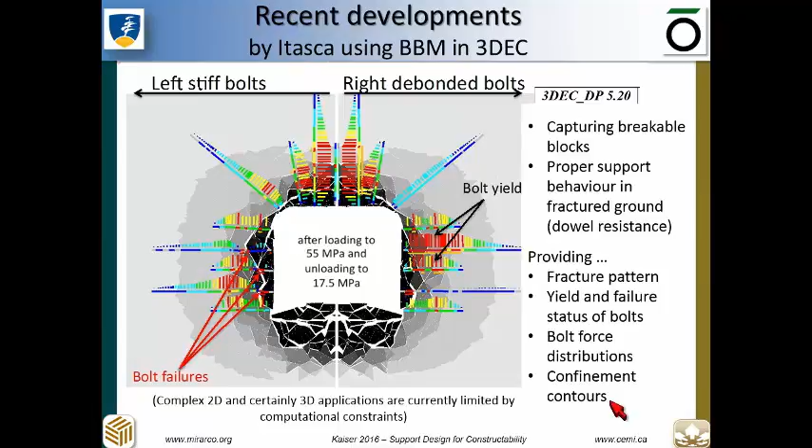So to analyze or predict in the future how support will behave, these types of technologies will be highly useful. Unfortunately, they are very computer challenging today and not quite ready yet for three-dimensional conditions, but they will provide us with the fracture pattern, the yield deformation that occurs, the bolt forces, as well as the confinement contour relevant for pillar design questions.

So let me conclude my presentation by simply saying that for economic and safe construction, it is important to anticipate the actual behavior of highly stressed rock. It has to be understood and documented during the tender stage so that we can anticipate the implications of stress fracturing, including the bulking process. Based on that, a contractor can be presented with efficient and effective ground control measures, and these measures have to be flexible because of the variability of stress and strength along a tunnel.

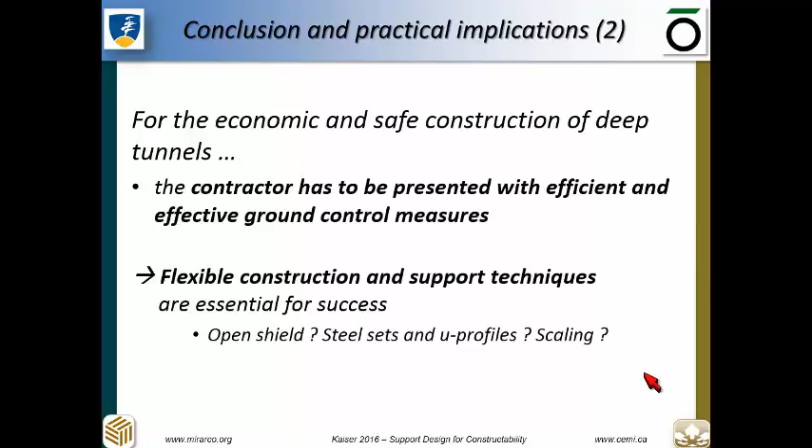We'll never be able to predict exactly where this process is occurring, and so methods of excavation and support have to be compatible with the fact that the stress fracturing process leads to low stand-up times and bulking processes. We have to change our thinking in the design from load on steel sets, etc., to a management of deformations.

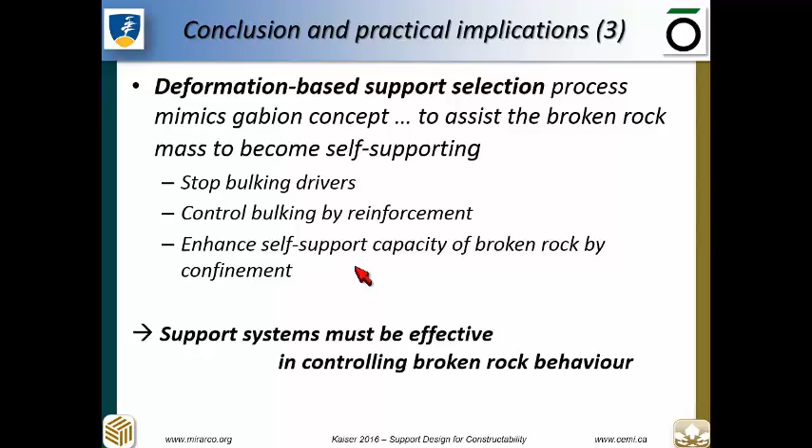As I indicated earlier, that involves eliminating the driver of stress fracturing, particularly in mining situations, controlling the bulking process when the rock is stress fractured, and creating a self-supporting arch around the excavation, as described by the gabion concept. So that brings us full circle to my introduction, which basically says that the challenges of managing highly stress-fractured rock is in building reliable arches around an excavation in a manner that cannot fall apart with low stand-up times.

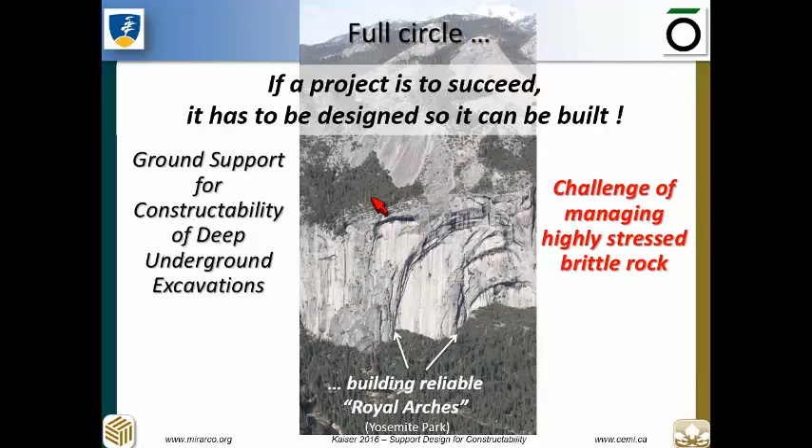And it also brings me back to my first point. If the technical details were confusing you, my message is a project has to be designed so it can be built. In stress-fractured ground, we have to take into account that stress fracturing is a major problem for the contractor, and we have to provide them with means to manage the low stand-up time issues.

I'd like to end with acknowledging many that have contributed to the work, particularly from Rio Tinto, while I was working at the Rio Tinto Center for Underground Mine Construction, but also many of my colleagues that have been contributing to various parts of the work that I have presented today. Thank you for your attention, and thank you to all the research sponsors.

The thicker guide contains the abstracts of all the papers being presented, as well as a WTC at a glance grid in fold-out form, and hopefully we have a visual of that product. It's in both of your guides, and it gives you a good sense of what's going to be happening during the Congress. There'll be a quiz in 5 minutes, so read it carefully.

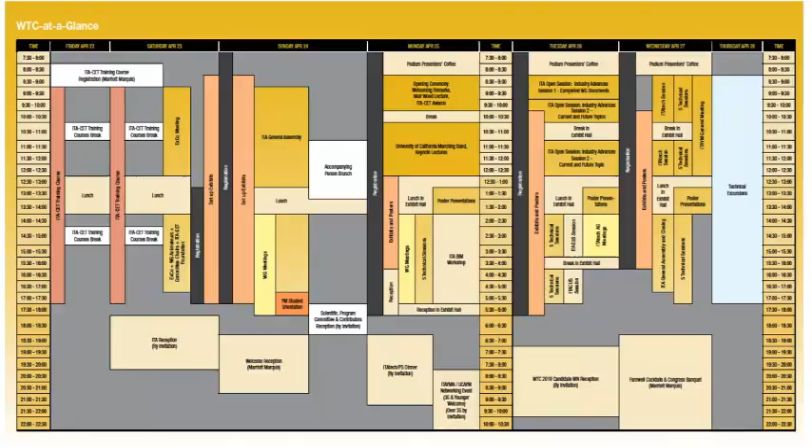The thinner guide contains a calendar of events, information on the conference sponsors and exhibitors, venue maps, and also contains this critical foldout. On the back side of the foldout is a session at a glance summary. This WTC glance shows all the functions that will be held during the Congress. Most of the events are here in the Moscone Center. Activities being held in the Marriott Marquis Hotel are noted on the WTC at a glance visual.

The technical sessions will start this afternoon, will be held tomorrow afternoon, as well as Wednesday morning and Wednesday afternoon. The exhibit hall will open at lunch this afternoon and will be open on Tuesday and Wednesday, starting with the morning breaks. There are a number of other ITA-sponsored events and activities, including a BIM workshop and a Think Deep session on Tuesday afternoon.

During the technical sessions, we will be keeping strict control of time so that you as delegates will be able to move from session to session, knowing that presentations you want to hear will commence at the exact times that are shown in your pocket guide.

Papers accepted for poster presentation will be displayed for the entire day on which their session occurs. They'll be displayed on the exhibit hall floor for the entire day. Authors will also be available between 1 and 2 p.m. during the lunch break to address any questions you delegates may have about their content.

Posters will be rated by a review committee, and a prize will be awarded for the best poster on the day. One for Tuesday, one for today, and two on Wednesday because we've got two sessions. The four winners will be presented with a rather handsome gift card from Amazon. Good luck to all.